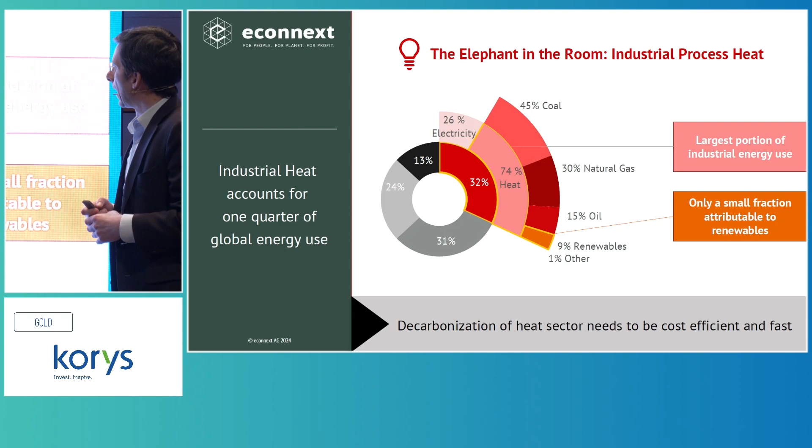This is mostly burning biomass and wood. So a lot of change is needed, and change needed very fast.

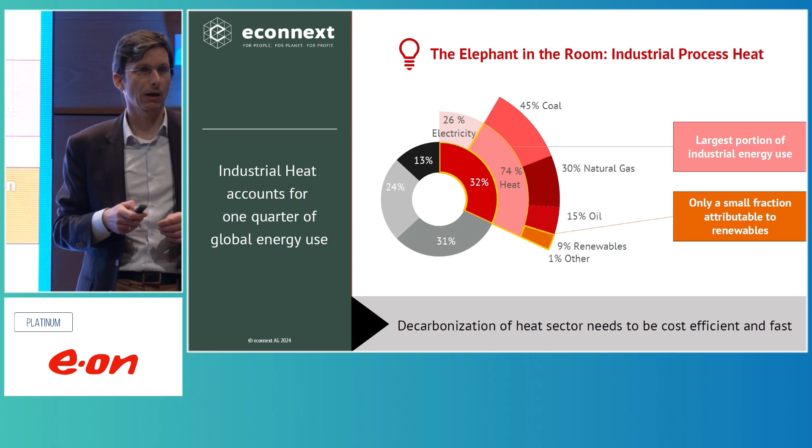And I think if I would point to one roadblock in that sector, it is the hesitancy by industrial customers that feel uncertain about solutions, feel uncertain about future regulation, feel uncertain about taking decisions. And I think this needs to be changed.

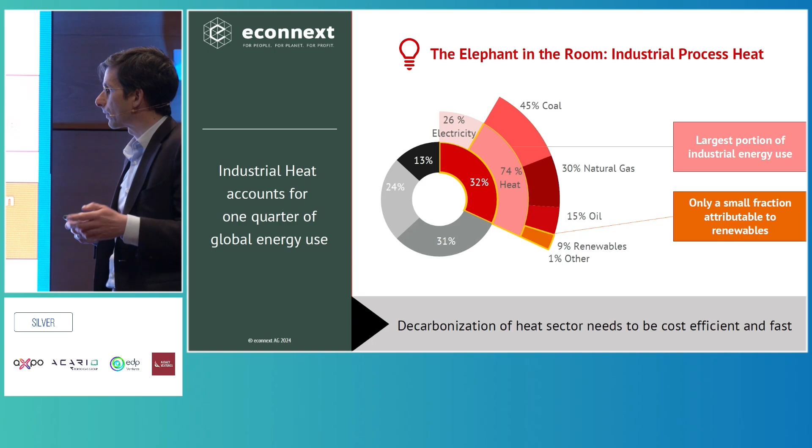The good news is that green heat solutions are readily available, and they are actually very attractive financially. I will later come to the two subsidiaries that we own as econnext, as majority shareholder: Circular Carbon and Lumenion. You see here nicely which temperature range they cover: Lumenion up to 450 degrees, and Circular Carbon even up to 1,200 degrees as a green heat provider for industrial sites.

And there is another good thing, and this happened just recently. We have been told by James Watt and others that you need to burn stuff in order to get steam or heat. And this is not true. There are other solutions out there.

Of course, heat pumps are important, but also the higher temperature ranges above 150 and 200 degrees are solvable with existing solutions. And I'm very happy to see The Economist, the Wall Street Journal, The Guardian, Financial Times, all talking about that, because it's a discussion that focuses very much on the silver bullet right now.

I think hydrogen is a big topic, and subsidies shower that sector. The technology needs to be developed. It's not mature yet. It's not big yet. It will be, and it's extremely necessary to have it.

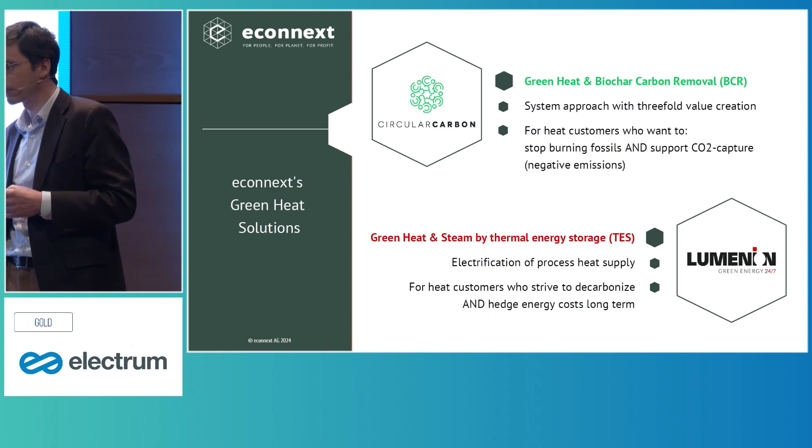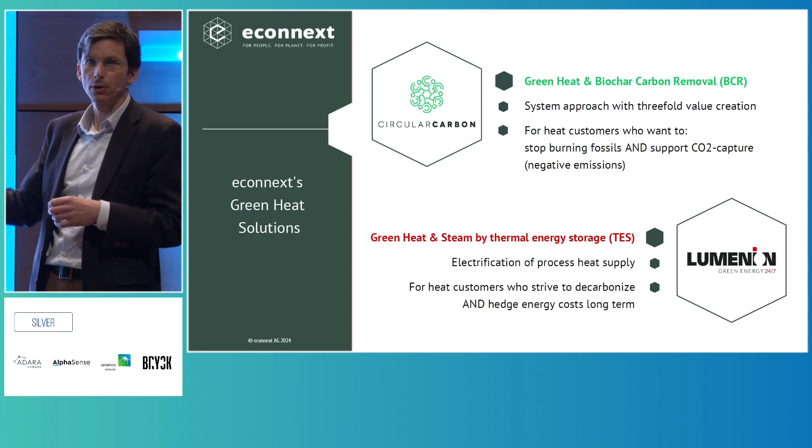Lumenion, with a thermal energy storage, is actually able to electrify the process heat supply, and the customer can decarbonize the process heat of the industrial site. Food, pulp and paper, and chemical sectors are the customers that come to mind first, because they are exactly in that sweet spot of heat demand.

Firstly, by the pyrolysis, you generate syngas. It's green syngas because it's just based on sustainable biomass waste and residues. And then you can actually produce biochar, which is a very valuable and precious product, in particular in the agricultural sector or the building sector.

By putting that biochar into the soil, for example as soil enhancement, you have a very nice side effect: you actually have a permanent CO2 sink. That is why you can generate the third revenue stream, sales of CO2 certificates, and you can do forward sales in that sector. So three different revenue streams here.

The industrial customer, who basically underwrites a long-term contract with you, 12 years and more, is asking you—in our case Circular Carbon—to sit next to the site to provide that green steam, and takes care of the biomass feedstock. The pyrolysis happens here at the Circular Carbon site, and then you have the biochar alongside the green steam.

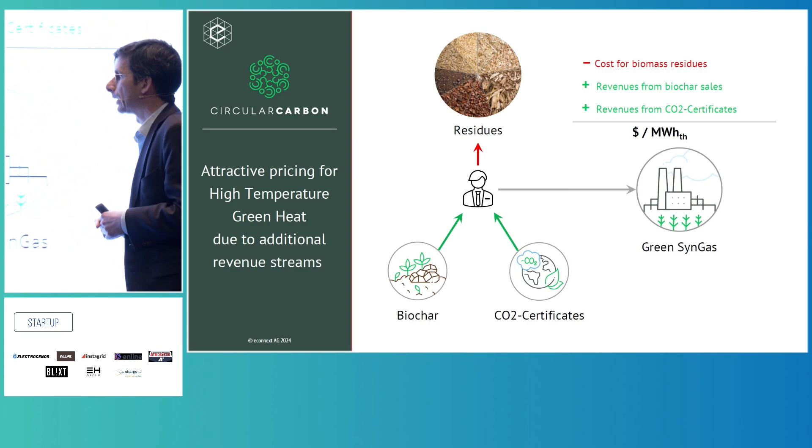So we need to take care of the biomass waste. This is a cost factor, and of course you need to buy that long term. There will be a certain volatility in the price, but by buying this commodity in large amounts, you can also gain a certain sort of safety or certainty with respect to price movements.

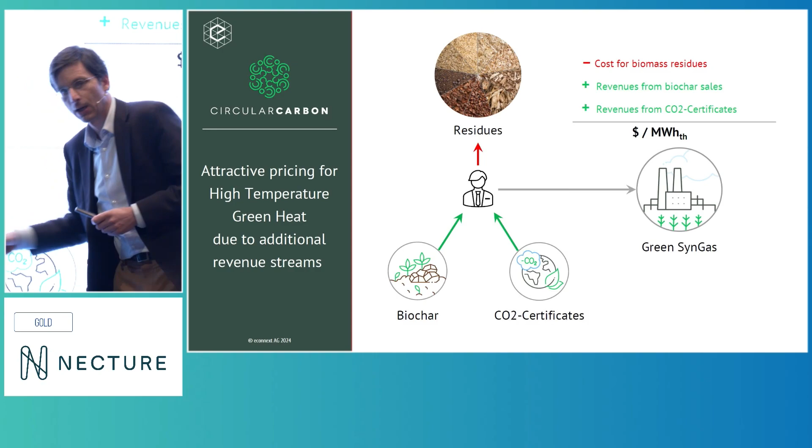Then you have these two revenue streams I mentioned previously, the biochar and the CO2 certificate revenue streams. And if you can show a long-term, 10 years plus offtake agreement on biochar at agreeable price levels, and showcase that this biochar is not being used for burning or similar, you can on top generate CO2 certificates.

These two revenue streams, and also the cost factor, you share through an open book approach with your industrial customer, and this has an effect on the green steam price. The industrial customer accepts that you as an investor need to earn some sort of IRRs, and everything on top lowers the price of the syngas.

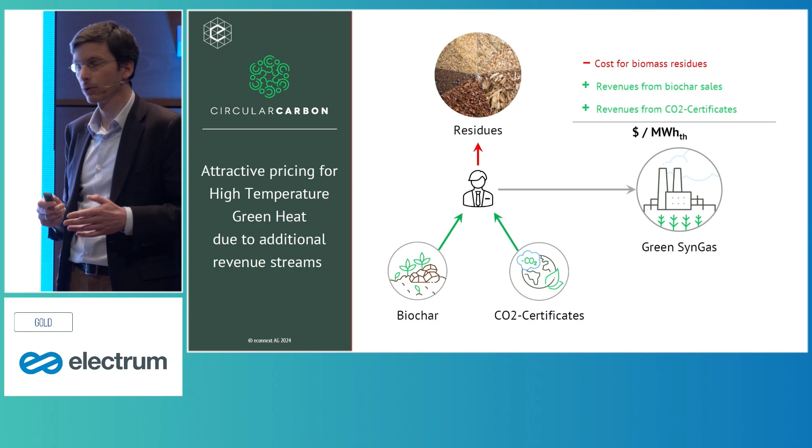There are scenarios, when you have attractive biochar pricing with other off-takers, where the green steam the industrial customer gets approaches the zero territory, very close to zero. Of course this cannot be guaranteed, and there's a certain level of downside protection scenarios where the price will be agreed at an acceptable level.

But there is an opportunity to lower this price dramatically, and this is a message to the CFOs and the energy procurement teams: super attractive, long-term, and also predictable.

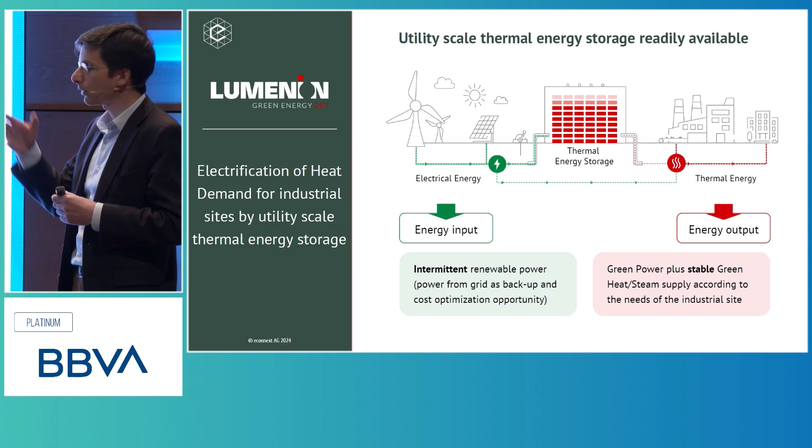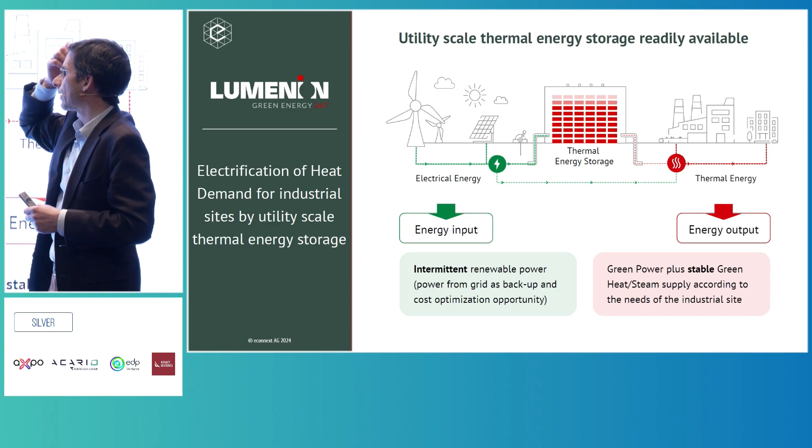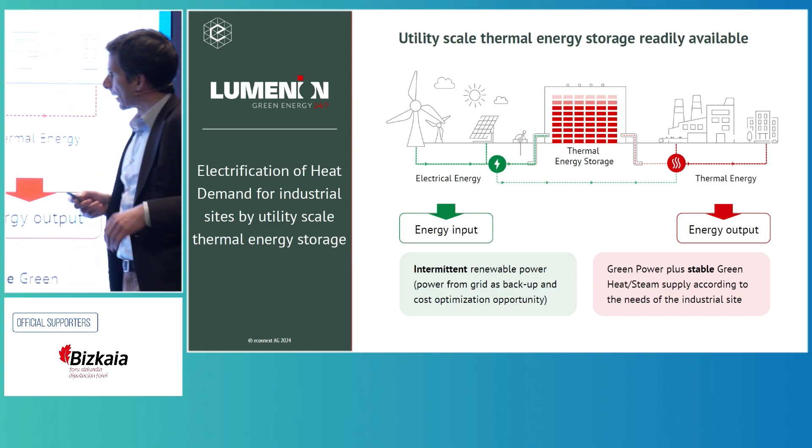The other solution I want to discuss is Lumenion, the thermal energy storage company. Very simple approach: you take intermittent renewable energy, store it, and deliver stable steam to industrial sites, or into district heating at lower temperature levels. I don't want to go into the tech here—it works, we've delivered that, and it's very reliable.

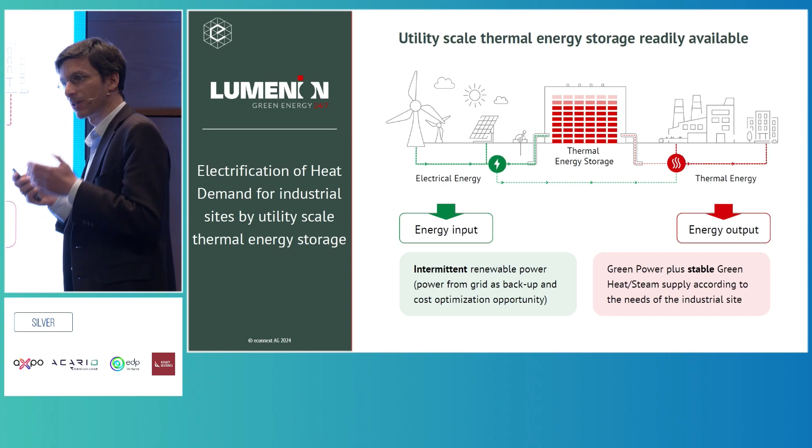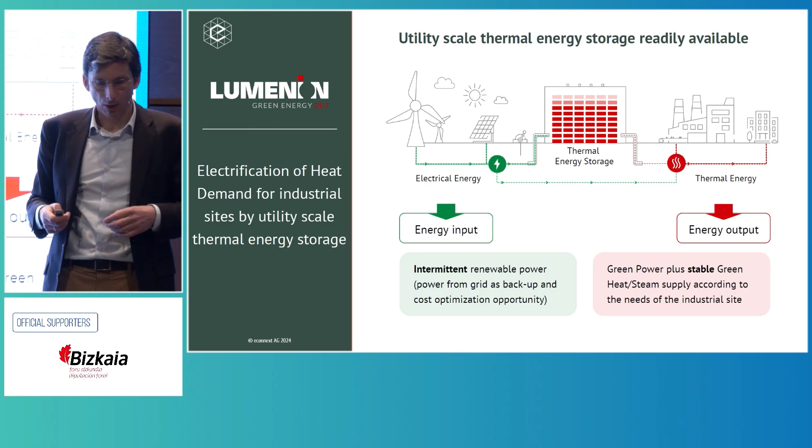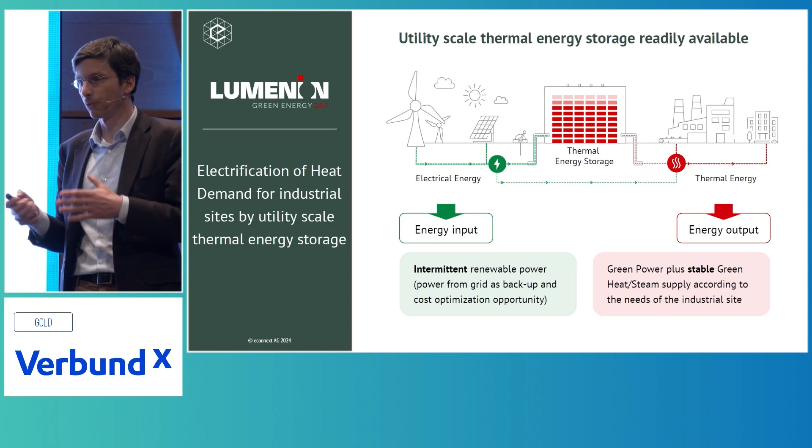It's extremely interesting in our case, since we can actually ship and deliver that globally, because we go with our design to the countries and use local content and local manufacturers to build that up. This is the beauty, because the core of the storage is steel, and every engineer globally loves to work with steel. So there's no secret sauce or fabric manufacturer somewhere in Germany where we need to ship material to Vietnam or South Africa or Canada. No, we can actually use the local providers and supply chain.

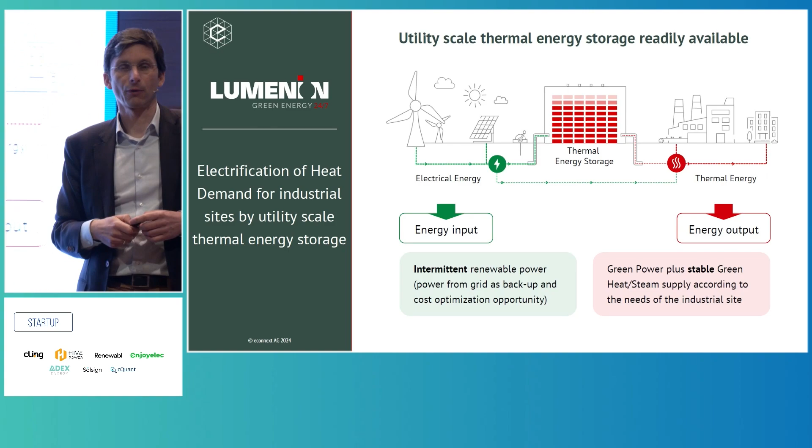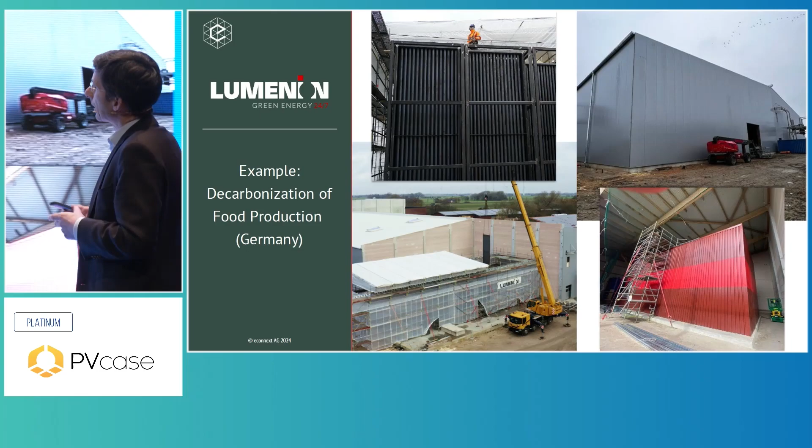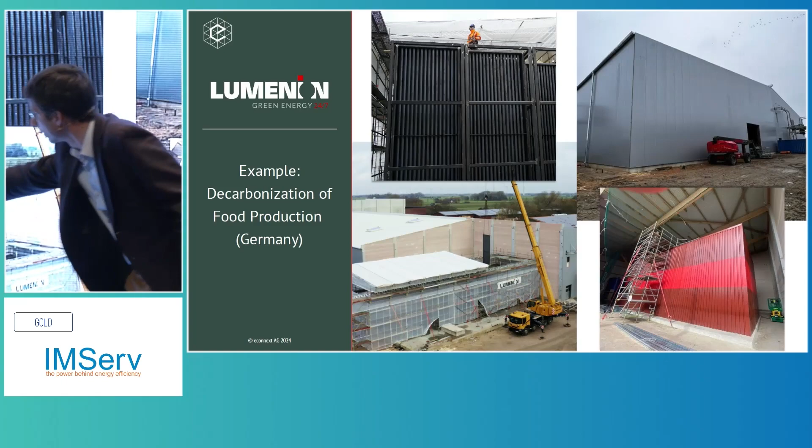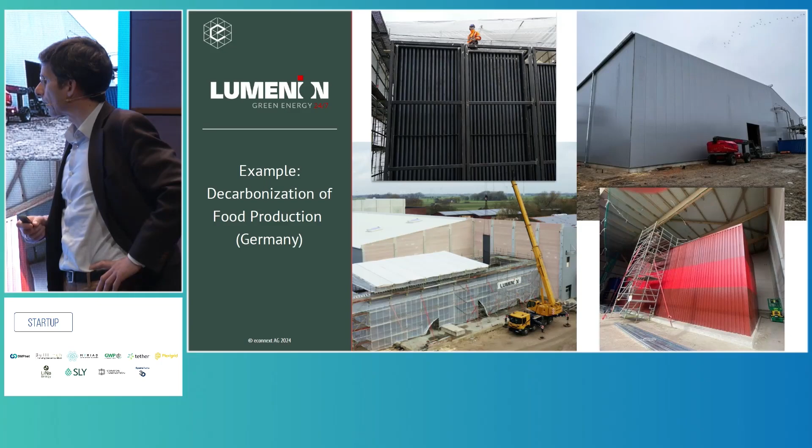And this is how a project looks like. You see it's pretty big dimensions. Here you see the inside - very simple, you basically put steel cassettes from above into that unit. You can see it here, I think this photo was taken 8 months ago. Once all this is done and collected, it's insulated, you see it like here. It's a little bit the size of a gym, 15 by 8 by 7 meters. And after that, it's basically covered, and this corner here is then this building, and it's part of, in fact, the largest organic food production company in Germany that wants to decarbonize their food production.

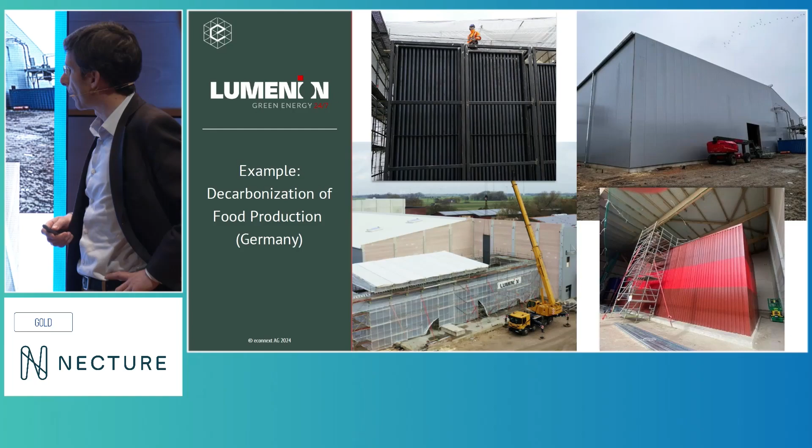So very simple, very beautiful, very reliable. And now the one and only chart I want to share with you, if I would have just one slide, is the slide for the CFO. Here the example is real numbers - it's a pulp and paper factory site in Portugal.

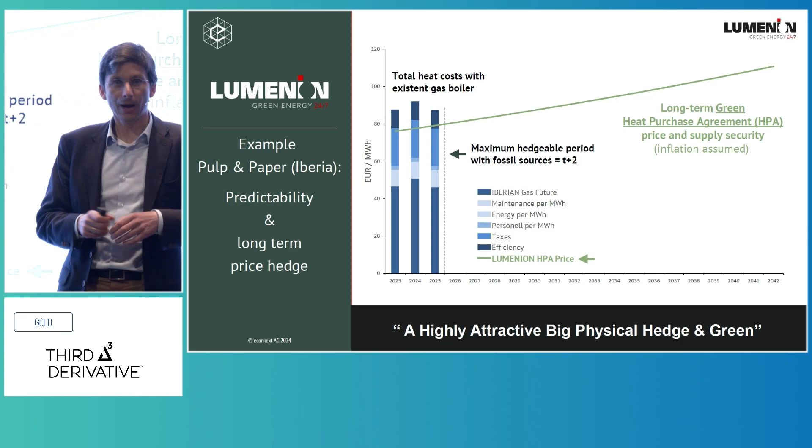What you see here is actually the current costs for natural gas and heat production, with the different components added here. The most important fact is, if you run on natural gas, you have counterparties, you can buy forward gas pricing, but just 2 years forward. Afterwards, you're completely open - you don't know how the gas price will be and what you need to pay over the next 15, 12, 20 years. Every industrial site lives with this volatility and unpredictability, and has done so in the last decades. But we all know what that could mean after the Russian invasion into Ukraine and the hike of gas pricing - the uncertainty whether gas is actually available, not the financial counterparty, but whether it's physically available. This is something which is actually a fact for every industrial site that runs on gas.

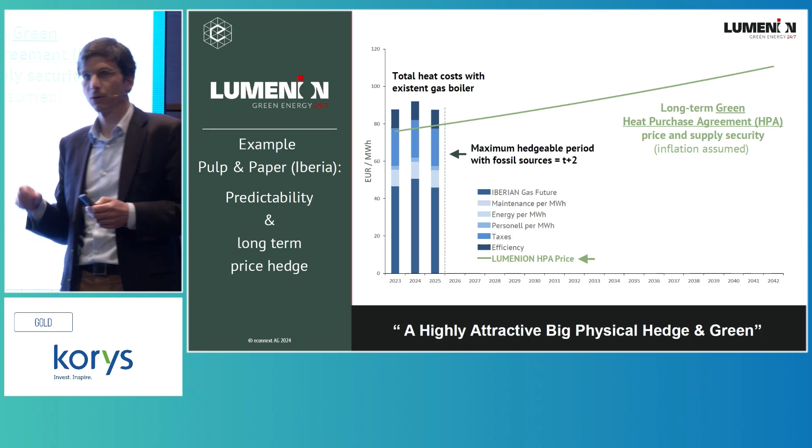And now the Lumenion solution. So taking renewable energy, taking our thermal energy solution and the delivery of stable heat, we agree with the customer on day one on a HPA - not a PPA, but a HPA. We can offer more attractive costs today compared to gas, and not only that, we can agree on a 20-year contract with the customer. The customer knows exactly what he needs to pay - this slight upward lift is inflation adjusted only. The customer knows what he has to pay over the next 20 years for his heat supply. So this predictability and the cost savings provide a long-term pricing hedge.

And this is, I think, the most important aspect of this slide and this presentation. It's a big physical hedge - the steam can be delivered even if gas markets are breaking down. And by the way, it's green - you decarbonize your site.

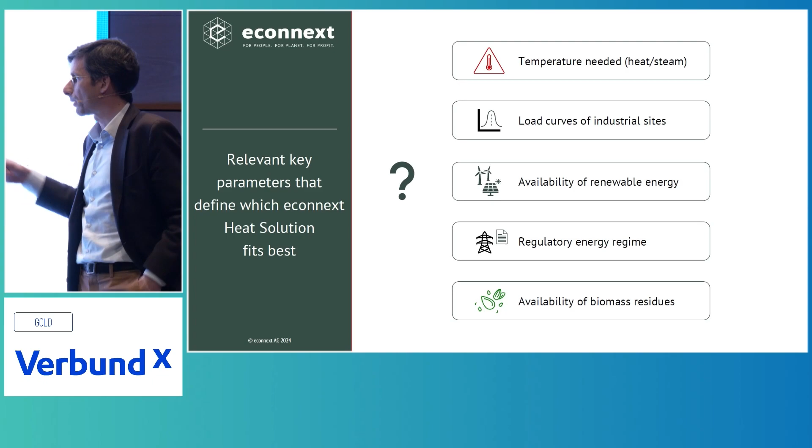So the question is, when do we actually decide for which solution? Those are the key parameters: it's the temperature levels, it's the load curves, it's the availability of renewable energy, of course it's the regulatory aspect - some countries are more attractive than others - and it's also the availability of biomass.

If there's one message that I ask you to take home and to spread, it is this: decarbonization with our solutions and others presenting here is readily available and financially highly attractive. There's predictability, it's cost savings, and it's decarbonization. It ticks all the boxes.